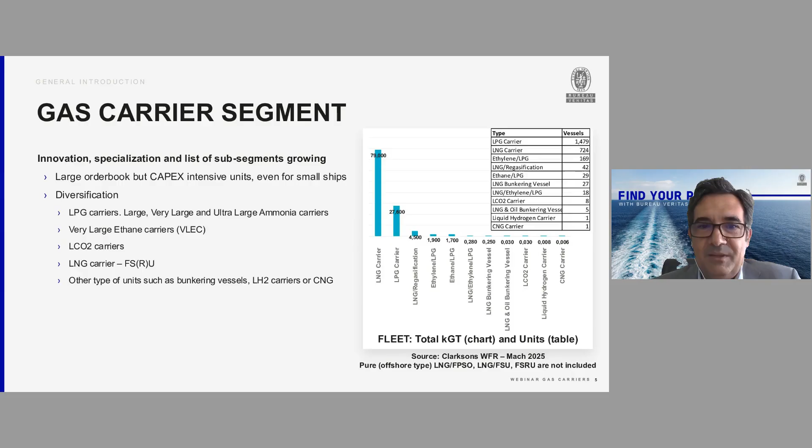If there are two characteristics that can be mentioned in this slide for this gas segment, especially for ships that are not in the natural gas market, the first is the diversification in type of projects, and you will see four examples in today's webinar. Secondly, of course, the innovation, new ideas that are being considered to make these vessels more efficient and safer. These are some details coming from Clarksons statistics about this diversification in number of ships and gross tonnage.

So we can start the first section talking about the LPG and ammonia market. This is a market that has potential to grow further, in particular the niche market of ammonia. In general, for LPG, there are key market highlights to consider, especially in the last years. There was a really significant change in the size of the ships, and the interest to transport LPG or ethane from the US because of the production of shale gas, as these products are associated with natural gas in the US.

This has changed the shape of the LPG industry: the ton-mile growth, the need to have bigger ships, the impact on the trades through the Panama Canal or the Red Sea passage. And these days, this is the main change in terms of export countries. In terms of market drivers, we have to mention the diversification and growth of the petrochemical industry, in particular in Asia, in countries like China, also India and Southeast Asia.

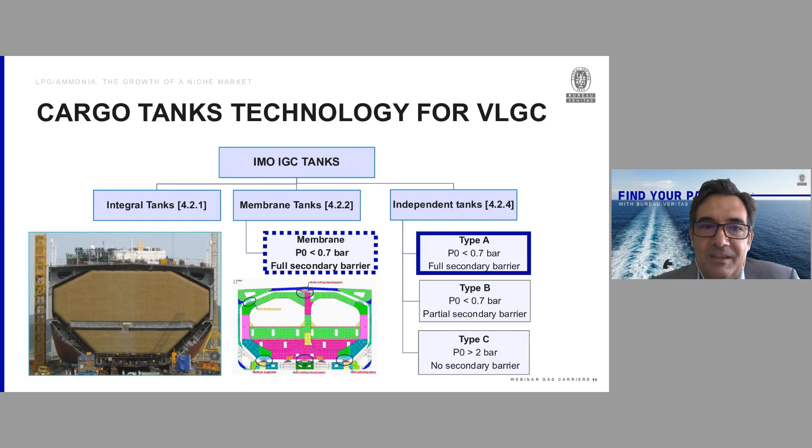In terms of materials, low temperature steel, we mentioned two of the most common steels that are generally used. When we are talking about ammonia carriers, we need to consider the additional cargo density of liquefied ammonia compared to LPG. This leads to a slightly additional draft and additional reinforcement for the tanks and for the supports of the tanks.

These days, the modern LPG carriers that also transport ammonia are prepared for full filling limits, not restricted, even if the density of the cargo is a bit higher. On top of the requirements of the IGC Code, the International Gas Code for liquefied gas transportation, we need to consider in the technical design of the tanks and ship structure the US Coast Guard conditions. This is much more important because these days the trade of LPG and potentially ammonia, blue in particular, or green ammonia in the future, from the US might be very relevant.

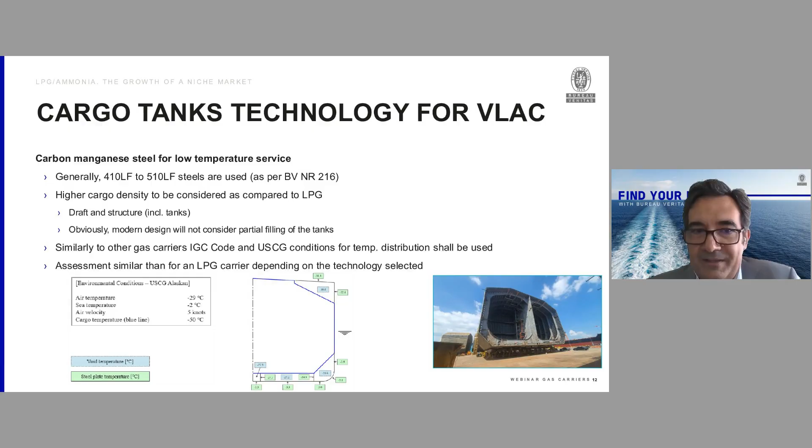In terms of regulations, what we have to highlight is that as of today, there is a revised text of the IGC Code that is not yet fully approved or adopted, because the full approval and adoption has been postponed to 2026. In any case, this code, which will enter into force in July 2028 if the adoption takes place at the end of next year, will include many new, modified, updated regulations, including, for instance, the use of other cargoes as fuel, for instance, LPG and ethane.

So this is a new development. It has been applied already. The use of LPG or ethane is not new in the gas segment, but now it's being formalized in the new version of the IGC code. There are also other regulatory developments in terms of IMO, which is, for instance, the use of LPG as fuel with the interim guidelines that have been used for a few years already and are already approved since 2024.

And regarding the ammonia as a fuel developments, we need to highlight that in the IMO there is an agreement already that specific toxic cargos, in particular ammonia, can be used from July next year. There is already a regulation and one circular that is allowing this cargo as a fuel for LPG ammonia carriers. The only missing point in this part of the regulatory framework in the IMO is the development of specific guidelines for the IGC code for gas carriers to use ammonia as a fuel.

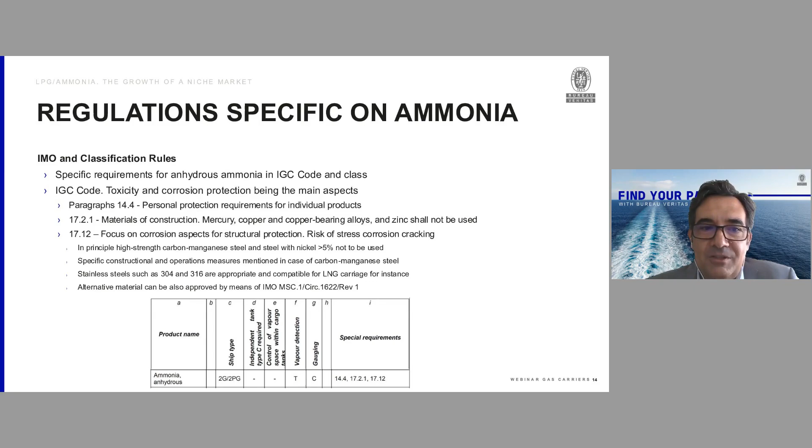So a bit more detail about the transportation of ammonia in the IGC code: it is detailed in paragraph 14.4 for the protection of the personnel on board because of the toxicity of this product, and also in chapter 17 specifically in order to reduce the potential corrosion of materials because of the ammonia corrosivity. Materials that cannot be used are described in 17.2.1, and in particular, also very important, materials for the cargo tanks and for cargo pipings, with some limitations to use steel alloys with nickel over 5% or carbon manganese steel. So there are specific requirements, and of course there are also guidelines or circulars from the IMO to take into consideration when the tanks are defined.

Another very recent development in terms of regulations for ammonia is also the possibility to use, in general for cryogenic cargos, high manganese austenitic steel. This is something approved by the IMO, with several revisions of the circulars that allow the use of this austenitic steel with high manganese. And in fact, these materials might be a bit cheaper for cryogenic applications, even for temperatures lower than minus 55 degrees, which is the threshold that the IGC mentions. But here we are talking about the specific requirements in terms of ammonia transportation only.

And we have mentioned, and that's very important, the challenges regarding the environmental regulations. Here in the LPG segment in particular, the use of LPG as an alternative fuel is not new; that is already well known. Of course, there are still remaining challenges in the operation of the ships, but LPG as a fuel is one of the solutions that are considered. Ammonia as a fuel, of course, is becoming popular, but as we mentioned already in the previous slides, the regulatory framework is not 100% established. And the second challenge for the time being is the technology, because the engines are still under development.

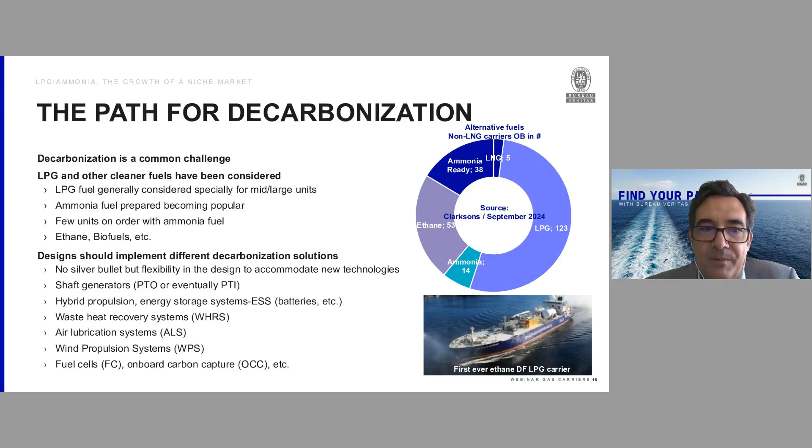There are other alternatives also to use other clean or decarbonized fuels, but not only fuels, also other technologies that we list in this slide. Of course, you may see that many of these new ideas or technologies are not only applicable to gas carriers, but we also consider that they are technically proven solutions that can be applied in the designs of LPG carriers, like shaft generators, PTOs, hybrid propulsion with PTIs, batteries, energy storage systems, waste heat recovery systems, and wind-assisted propulsion. Wind-assisted propulsion in particular will become more popular for LPG carriers first, and then maybe other types of gas carriers.

And we have to also mention the latest developments in Bureau Veritas, just to give a few examples of ships in the frame of LPG and/or ammonia, in particular very large ammonia carriers under construction in Korea with ammonia-prepared capability. An example by Naftomar under construction in Hanwha Ocean. Another example that has already been delivered, the mid-size ammonia-prepared notation by Bureau Veritas in two ships already in service since 2023-2024, delivered by Hyundai Mipo in Korea.

And on the right-hand side, very interesting to see the first ever example of a new build of an ammonia bunkering vessel, BV class. It was announced in the month of July this year. Sasaki design, Sasaki shipbuilder, for Itochu as a ship owner. 5,000 cubic meters capacity, relatively small for the time being, because in fact the ammonia bunkering industry is still to be developed. And we have been supporting, of course, ammonia bunkering vessels with other designs, with mainly Japanese and Chinese designers and shipbuilders.

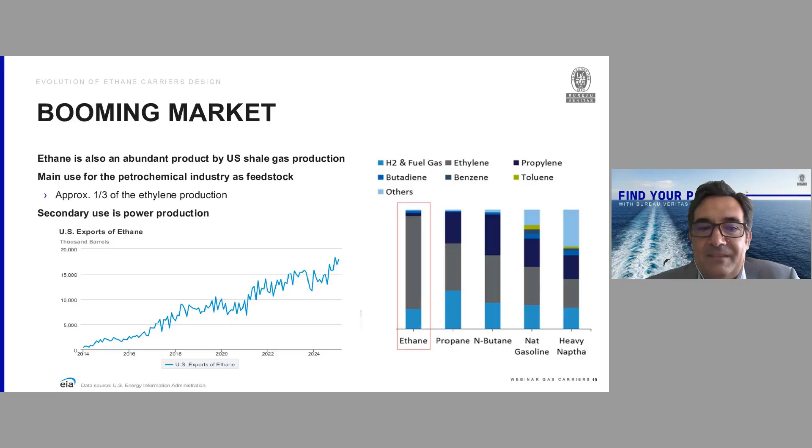Of course, there is production from this ethane as a raw material. The first industry application is ethylene production. There are other applications, and you can see here the evolution of the US exports of ethane since 2014. That is really significant. This is continually growing, and other terminals will be developed in the US to transport this product. Of course, there are some challenges still today for the ethane trade between the US and the Far East. Still, the price is affordable. That's one of the main advantages, and this is why it is being used for cracking to produce ethylene, as compared to naphtha or to propane, for instance, to produce propylene.

The ethane crackers are developing in China and in India, and the capacity is growing with big companies there. But there are some challenges regarding geopolitics. There are, on one hand, some canal restrictions, tariff discussions. This is not finalized, but the US, as we know, is putting in place some commercial tariffs for imports into the US, and other countries are doing the same for imports of US products into China, for instance. The USTR is also something that may impact the fabrication of these gas carriers in China, but the real effect of these geopolitical discussions for the time being is not something that we can forecast or predict easily.

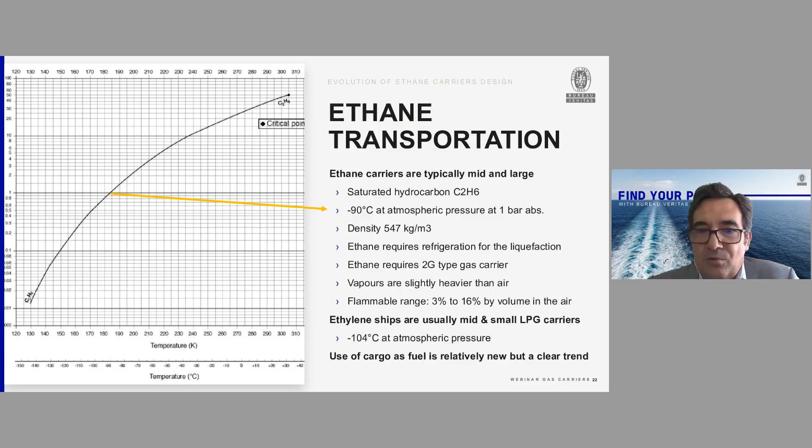Flammable range is similar to LNG, so there's no big issue on that from a technical point of view, because we have a lot of experience with LNG as fuel, and nowadays with ethane as fuel too. In terms of technology for the cargo tanks, the main two technologies used are membrane by GTT and Type B independent tanks with the insulation attached to the tanks.

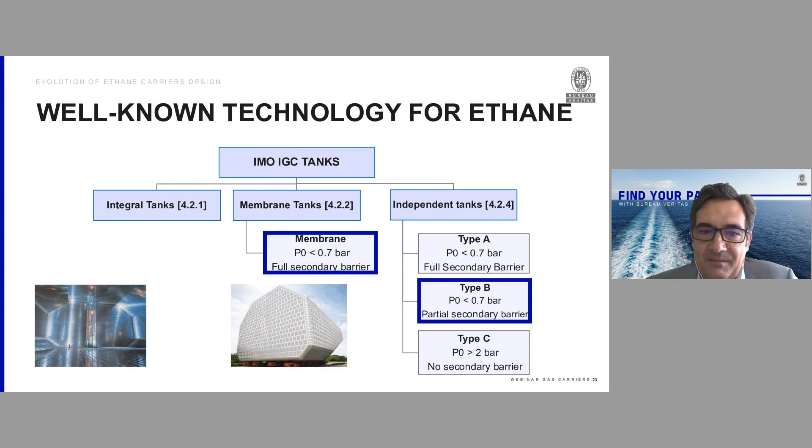Both technologies are reliable and proven for many years. In the frame of ethane, they have already been used in LNG as well, primarily membrane at this moment, but in the past also with LNG Type B.

There is no challenge in principle, and this slide illustrates the orders and ships in service, information coming from GTT, one of the two designers of this type of cargo tank, particularly the membrane, with different projects developed in shipyards in Korea and China. With the membrane technology, basically the Mark III, and with the Type B technology.

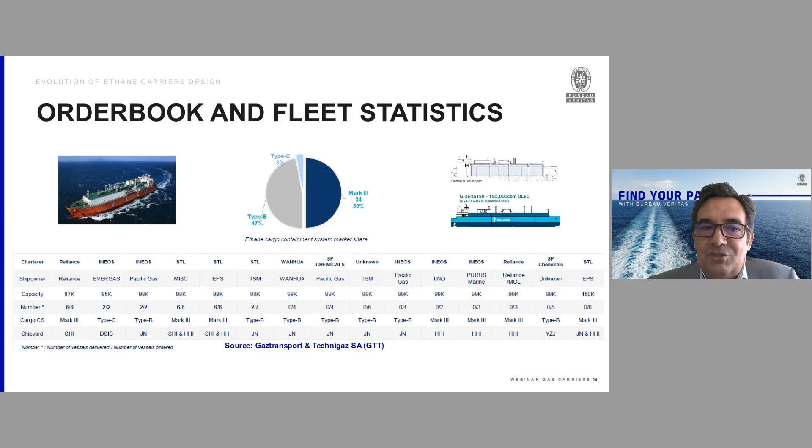And only one example with a Type C tank that is relatively big, but that's quite specific, and in principle we will not see it again in very large gas carriers.

We have to highlight also an important development in the market: the membrane technology, in particular not the previous one, not the Mark III that has been used typically for some of the very large ethane carriers already built, and some still on order. In fact, this technology was approved a long time ago by Bureau Veritas in 2014.

But the new concepts developed this year are much more interesting, because they are tailor-made for very large ethane carriers or ultra-large ethane carriers for the transportation of, in principle, liquefied ethane, potentially also LPG. The main difference between these systems and the traditional Mark III and NO96 is the thickness of the insulation, which is reduced, making the system easier to build, easier to fabricate, and at the end of the day cheaper for the shipyard.

So we may see some examples in the future of these slim systems, NO96 and Mark III, applied in shipyards involved in ultra-large or very large ethane carriers.

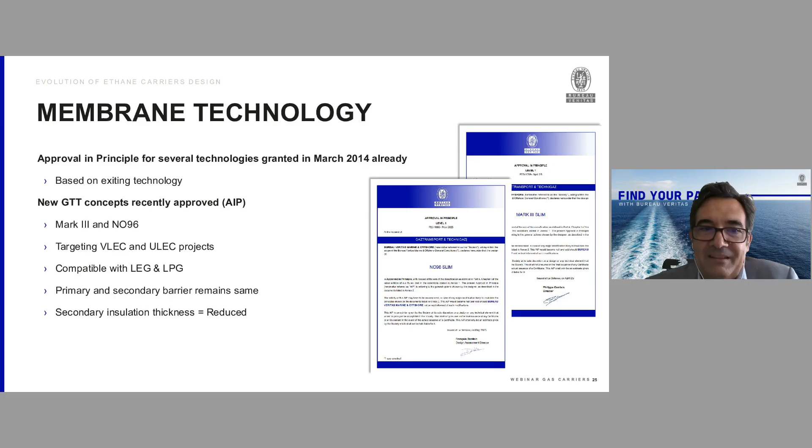For the use of ethane as fuel, the first example was developed for a series of ships owned and operated by Seapeak these days, formerly Evergas, built in China — a series of 8 handy-size LNG, LEG, LPG carriers with engines by Wärtsilä that were in fact retrofitted at the end of the new building process in the shipyard to burn ethane instead of LNG.

And the vessels have been in operation, are still in operation, transporting ethane from the US to North Europe and burning ethane as fuel, with specific Type C tanks on deck for this fuel.

On top of this technology, which was the first approved for ethane as fuel, we have engines running for a few years already with high pressure gas injection — that's MAN, or better to say now Everllence, the new brand name of the company — similar to the LNG two-stroke dual fuel engines, but with gas injection even higher than natural gas injection.

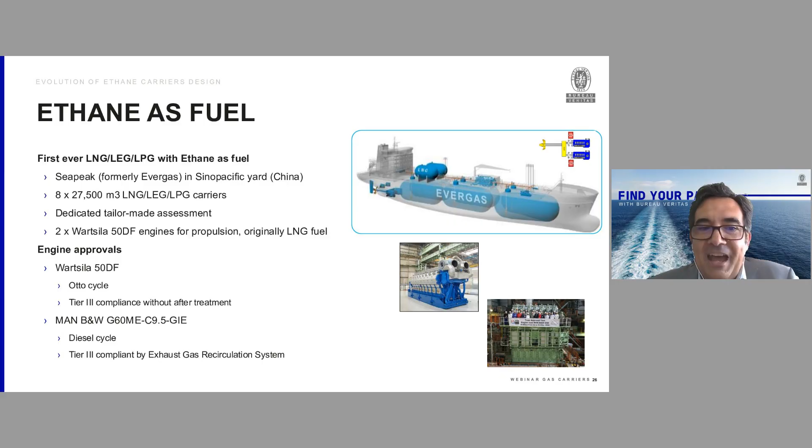To finalize with some references of Bureau Veritas experience, on top of all the previous experience on handy size ships in the range of 20 to 30,000 cubic meters, typically equipped with Type C tanks, we have a very good reference now with 5 100,000 cubic meter VLECs under construction in China for a company called SP Chemicals.

That is a design by Marek with 8 Type B prismatic cargo containment tanks — basically 4 tanks divided in the middle with a longitudinal wash bulkhead. They will be equipped with the MAN Everllence dual fuel ethane two-stroke engines, and they are capable of transiting through the Panama Canal.

We also have other examples, approval in principle, mainly with companies in Korea and China, also including ultra-large ethane carriers.

Good, and I give the floor to Jose again. Thank you.

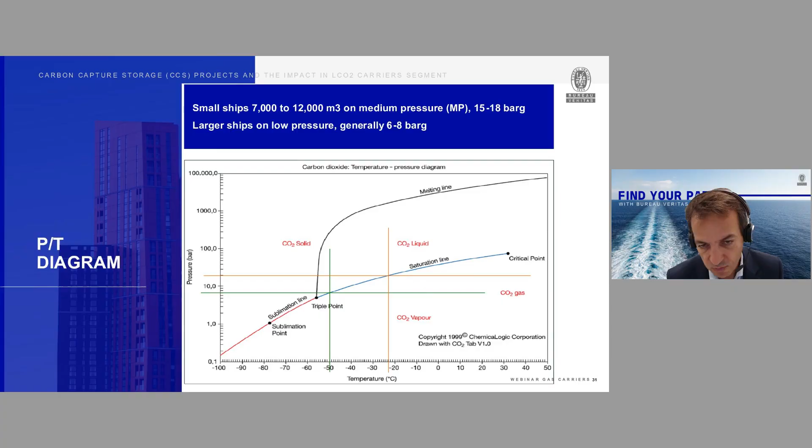Of course, we cannot talk about CO2 without showing a pressure temperature diagram. A particularity of CO2 is its triple point, which is very high, so we cannot transport CO2 at atmospheric pressure if we want it liquid. We need to be above the triple point, so above something like 5 to 6 bar, depending on the temperature. The green line shows the low pressure range, around minus 50 degrees and 6 bar. The yellow-orange line shows the medium pressure range, around minus 30 degrees and 15 to 18 bar.

The challenge with this low temperature and elevated pressure is, of course, material selection, which is covered by the IGC code. In the IGC code, table 6.2 restricts yield strengths, imposes some temperature design requirements if we go below minus 10 degrees, and requires additional treatments such as post-welding treatment and so on.

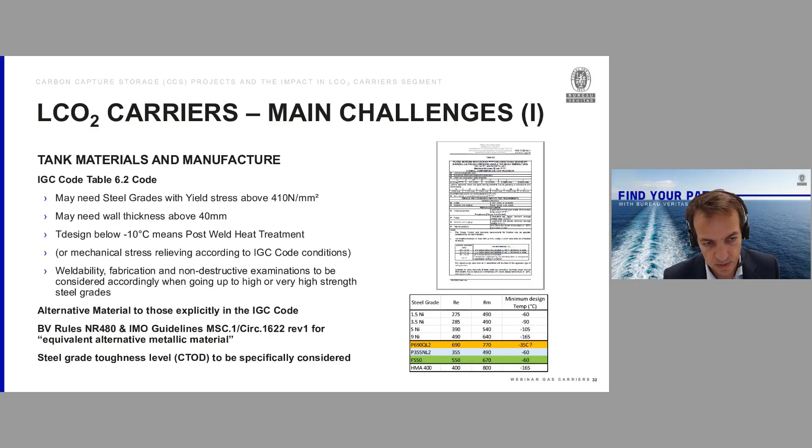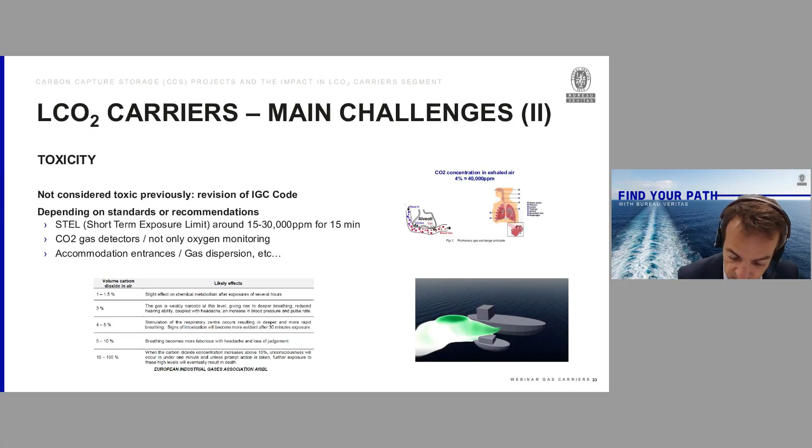What's the consequence of that? Gas detection. So not only CO2, not only oxygen depletion, but CO2 concentration in some particular areas, such as the accommodation entrances, and some few requirements on gas dispersion.

Of course, impurities is a very famous topic. The problem is CO2 is coming from different streams, so depending on the capture technology, we may have different impurities. The risk of impurities is acidic formation, so corrosion, and also an impact on the phase temperature diagram, which may create issues on the transportation condition. So Northern Lights, for example, has updated their specification last year or two years ago, and ISO and different working groups are working on different CO2 specifications depending on the need. The ISO specification is linked to pipeline transportation.

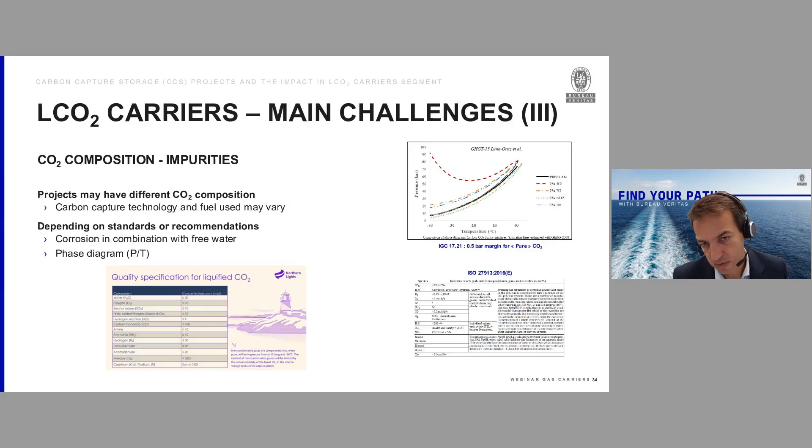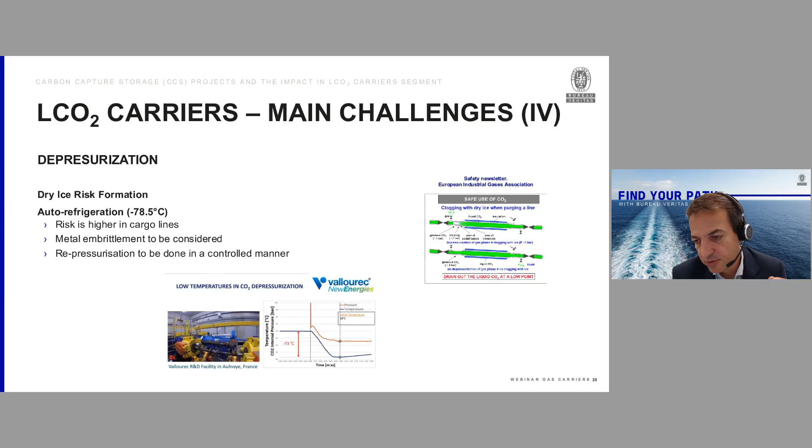And of course, depressurization is the famous topic. The fact is, during depressurization, CO2 will go to very cold temperature, around minus 78.5, so it will create brittle conditions for the metal, for the pressure containing parts. And dry ice formation - the risk would be, in case of depressurization, we can have blockage in the lines.

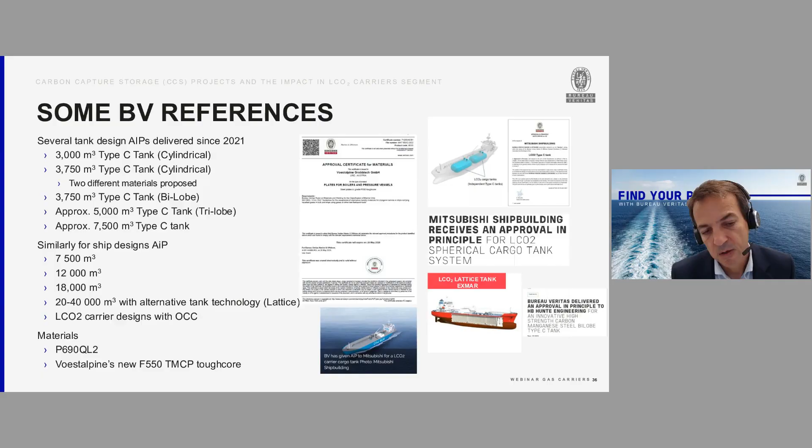So, of course, BV has been working a lot on different topics - tank design, ship design, and material, as said, which is a very particular topic. Two famous ones: the P690, with different tank manufacturers to qualify welding procedures, and then the voestalpine new F550 TMCP tough core with very good characteristics. And of course, it's an important topic for us - this CO2 vessel for the Greensand project that should soon be delivered, which is under construction.

I think we will have a poll.

So which type of cargo condition do you think would prevail in LCO2 carriers below 20,000 cubic meters capacity? Either low pressure, which is around 6 bar minus 50 degrees, a medium pressure around 18 bar and minus 21 degrees, or an elevated pressure of 40 bar and 5 degrees. Or other.

Okay, thank you. Then let's now switch to liquid hydrogen transportation, supporting clean hydrogen shipping.

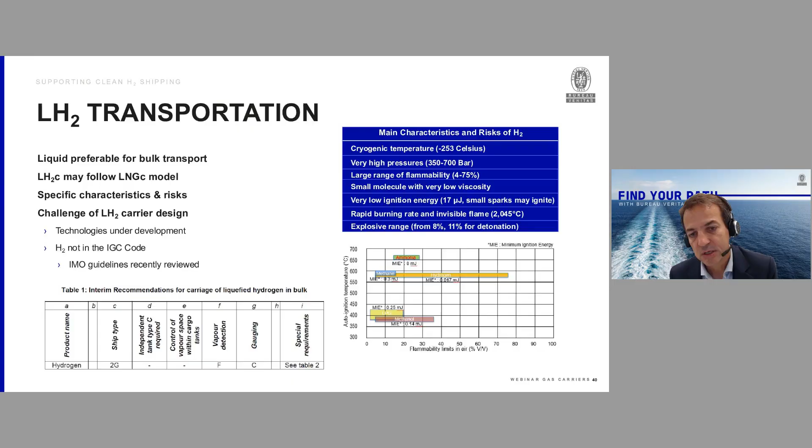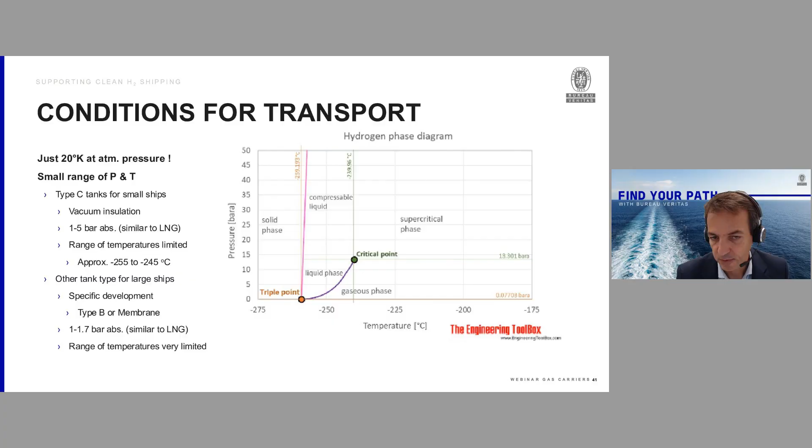Rules and standards: as we said, the IGC code does not fully cover this. So there is an interim guideline which was first released in 2016 and which has been revised and adopted at the 108th committee, which is MSC.565. So this could refer also, as a gas transportation vessel, to SOLAS, the FSS code, and the IGC code. But this MSC guideline would also refer to some standards, particularly in terms of material selection and qualification, fire detection, and things like that.

Significant projects developed, so a lot of JDPs and AIPs, and we are particularly proud of this project, which involved a lot of actors: development of a 150,000 cube vessel design with GTT and LMG Marin as a designer, which was already published some time ago. But you can see that a lot of different designs have been developed also.

And we have a couple of polls before we move into questions and answers. First one is: which carrier segment, other than LNG carriers, do you see expanding faster in the next years? LPG carriers able to transport ammonia, very large ethane carriers or ultra large ethane carriers, liquefied CO2 carriers, or liquefied hydrogen carriers? Please make your choice. And there is a second poll that will come out in a moment. And I will leave you for the questions and answers.